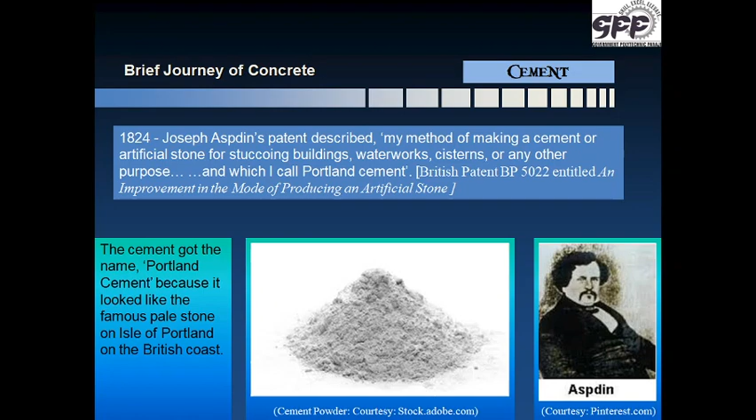In 1828, I.K. Brunel is credited with the first engineering application of Portland cement, which was used to fill a breach in the Thames Tunnel. Now, in 1848, a very important discovery occurred. Rather the work was started in 1844, I can say, Jean-Louis Lambot was the first to use reinforcement in concrete. He constructed several small rowboats or boats of concrete which he reinforced with iron bars and wire mesh.

So notice over here, John Smeaton had done the cement earlier, then it was Joseph Aspdin. Joseph Aspdin gave the cement to the world. Experiments started working on the cement. I.K. Brunel used the cement further, and then we find that in 1844 or rather 1848, Jean-Louis Lambot creates a boat, and this boat is of concrete, and he has used reinforcement in concrete, and this experiment was successful.

In 1854, William B. Wilkinson, an English plasterer, erected a small reinforced concrete two-story servant's cottage. He reinforced the concrete floor and roof with iron bars and wire rope. This is credited as the first reinforced concrete building.

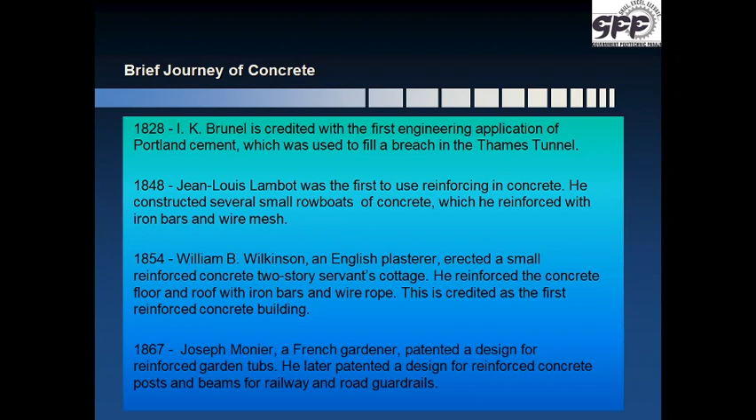Lambot's bateau, as it is called, Joseph Louis Lambot invented ferrocement, which eventually developed into reinforced cement concrete or RCC. In 1841, he started constructing masonry water tanks and masonry troughs using cement mortar. As I told you, after the cement was made public, people were knowing about it, people were experimenting. So Lambot did masonry water tanks and masonry troughs using cement mortar.

He also tried experimenting the use of iron reinforcement, most likely in the forms of iron rods, chicken wire mesh, and so on. Then he constructed his first boat using the same system. What Joseph Louis Lambot has told is there over here. What he says is, my invention shows a new product which helps to replace timber where it is endangered by wetness, as in wood flooring, water containers, plant pots, etc.

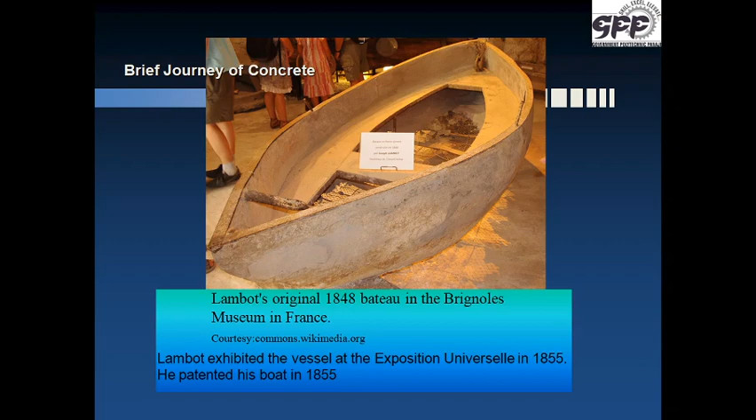He said, my invention shows a new product which helps to replace timber where it is endangered by wetness. And this particular product was a good one. This product, which took birth as ferrocement, later on went on to become RCC, which we understand today.

Continuing with the brief journey of concrete, we find that in 1903, the first skyscraper anywhere in the world was built in the US. This was the 16-story Ingalls Building, which is still standing to date. Soon after this particular structure was built, people started looking at RCC as the material of the future.

Let me tell you about this Ingalls Building. It was not accepted by people just by the look of it. What must have gone through people's minds when they were told that we are going to use RCC, we are going to use concrete for a skyscraper? Do you think people must have accepted it? This 16-story building was a great achievement at the time, and its success led to the acceptance of concrete construction in high-rise buildings. But prior to this, the highest building was only a 6-story building.

Since concrete is weak in tension, people felt that a concrete skyscraper as huge as this one would collapse in no time because of the wind loads and maybe under its own weight. Ironically, when the building was finished and the supports, that is the formwork, were removed, it is said that one reporter stayed awake the whole night to be the first one to report the building's collapse.

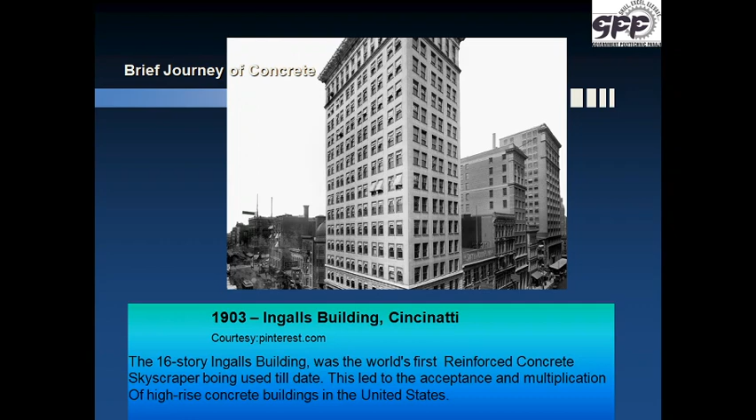Well, this building stood the test of time and it still stands. This was one of those buildings which has made us rich. This building has given us good dimensions to go ahead with skyscrapers.

Continuing further, in the US they later built a massive concrete structure, the Hoover Dam. The Hoover Dam is a dam in Black Canyon on the Colorado River. It was constructed around 1933, between 1930 and 1936, and it is the highest concrete arch dam in the United States. This Hoover Dam is a massive concrete arch gravity dam. It is very thick at the bottom.

It is about 200 meters thick at the bottom and very thin at the top, just 14 meters thick, and presents a convex face on the water side above the dam. The curving arch of the dam transmits the force of the water onto the abutments, which are the rock walls of the canyon. A huge amount of concrete, 24 lakh 80,000 cubic meters, almost 25 lakh cubic meters of concrete, has been used in this dam.

There was one problem in constructing this dam. If the dam was to be built in one single continuous pour, there would have been a problem of heating, because we all know that concrete gives off heat during the reaction, during hardening. This heating would have been uneven, which would have presented problems of uneven contraction and serious cracking. Plus, the calculations showed that it would take 125 years for the concrete used in the dam to cool down.

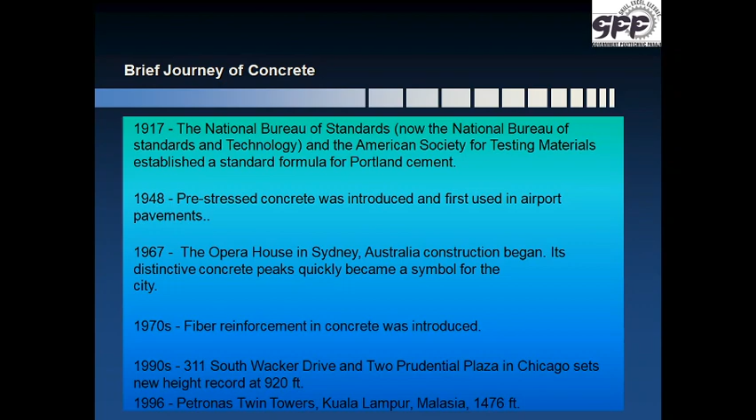This facility, the Sydney Opera House, a multi-venue theatrical center at Sydney Harbour, has a series of large precast concrete panels in the shape of shells, each composed of a section of a sphere of 75.2-meter radius, covering the roof of the structure. Let me tell you, it had its own problems.

The architect had presented the plans but had not consulted the engineer. The plans were approved, and when these plans were given to the engineer, they looked at the plans and said, "This does not fit. The curve on one side of the shell was not meeting with the curve on the other side. A gap was getting created at the junction line between the two shells."

So the architect gave an option. He said, "Why not do them with pre-stressing? If you do with pre-stressing, the sections are going to be thin and the weight is going to be less. You can connect easily." But the pre-stressing created its own problems, because after pre-stressing, deformation occurs and the lines were not joined. They had to do about 12 to 13 iterations for the curves, and yet the shape was changing from a parabola to an ellipse.

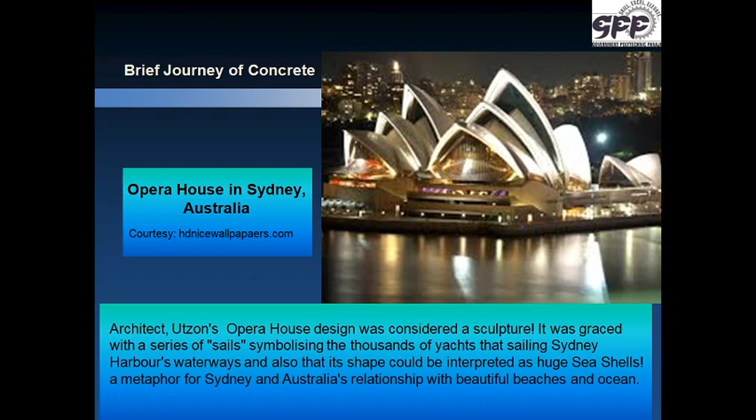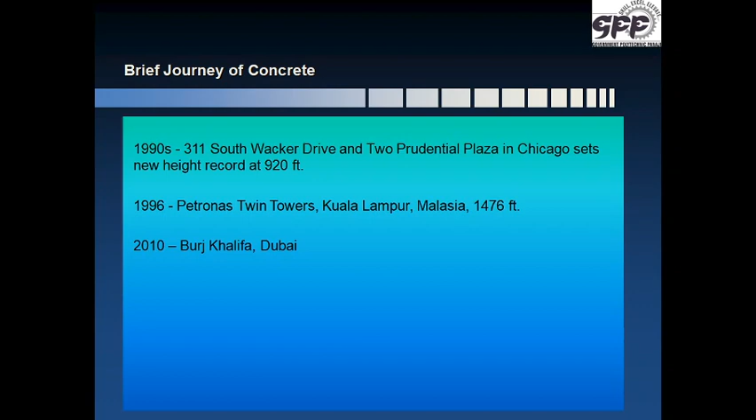So good it was. Now coming to the 1990s, where I told you about the 311 South Wacker Drive and Two Prudential Plaza in Chicago, then the Petronas Tower and Burj Khalifa, which we see in 2010. Now, as far as the 311 South Wacker Drive, Chicago is concerned, I have already informed you. It is the tallest skyscraper, about 920 feet tall. Up to the 51st floor, the tower is designed to be trapezoidal in plan, and after the 51st floor, it becomes octagonal in plan.

All alternate solutions were checked before arriving at reinforced concrete as the construction material for this building. They wanted to use lightweight material, but lightweight material was giving problems with the wind load. So they tried steel frame. With steel frame, they had other problems of fabrication. High costs were there as far as fabrication is concerned, plus construction time would have been more. So finally they zeroed in on reinforced concrete.

Now high strength concrete was used here with superplasticizers. To place the concrete, just one high pressure pump was used with a special boom. The core of the building rested on an 8-foot thick concrete mat that was supported by 92-foot long caissons socketed into bedrock. The tower columns are also supported by similar caissons. This was one of the tallest reinforced concrete buildings in the world.